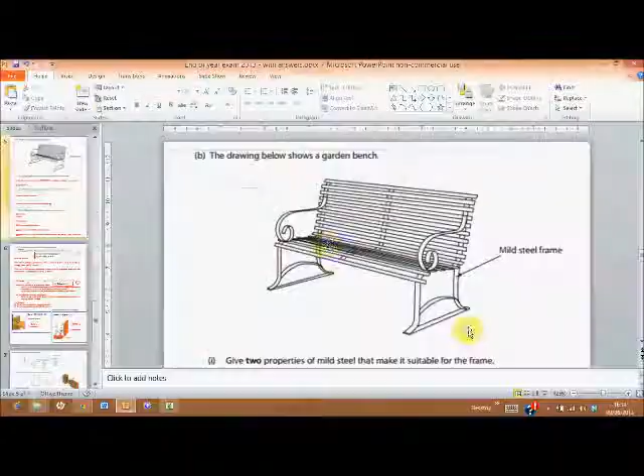Right, this one caught quite a few people out as well. This is a garden bench. Now, the question says, give 2 properties of mild steel that make it suitable for the frame. Right, so let's look at that frame.

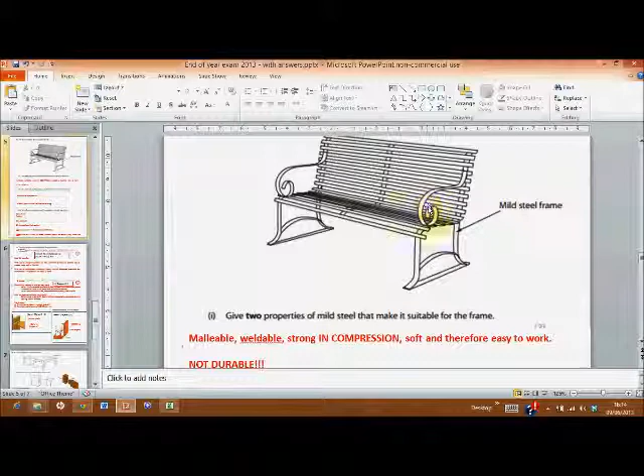Someone has decided to take this mild steel and bent it around. So what property allows it to be bent like this? The answer is malleable. It is easy to bend without it breaking. We can hit it around. A blacksmith needs things to be malleable because he starts it in one shape, heats it up, and bends it into a different shape.

How is this fixed together? How does that stay there? Well, it is welded from there to there. So we say mild steel is excellent.

Now, look, mild steel, guys, let's remind ourselves of this. It is the cheapest metal in the entire world. And it is the most used metal in the entire world because A, it's cheap, and B, it is very easy to work with. So easy to work with is something you can actually say. That means it's easy to cut because it's quite soft compared to high carbon steel, like your drill bits and your saws. So it's quite easy to cut, it's quite easy to drill into, it's quite easy to bend.

It's very weldable. So you can weld it together. It loves being welded. It does, our mild steel.

And we can't just say strong, I'm afraid. That doesn't mean anything. We've got to say strong in compression, because when you sit down there, if you get 5 people on there who are heavier build, with people on their laps too, we don't want these to get compressed and buckle. We need to be strong in compression. Might want to say it's tough in case someone jumps on it. It doesn't want it to shatter. That would be acceptable too.

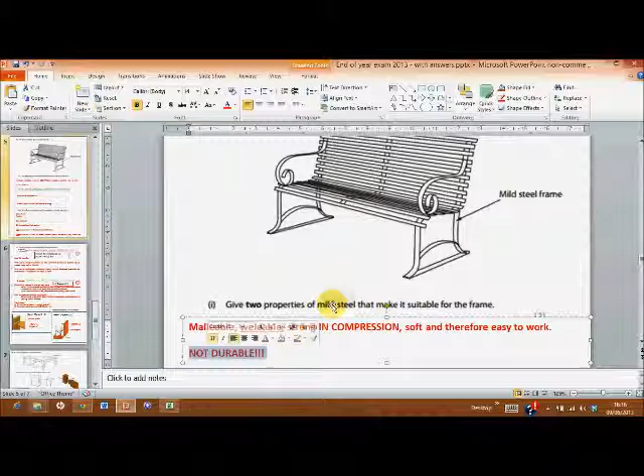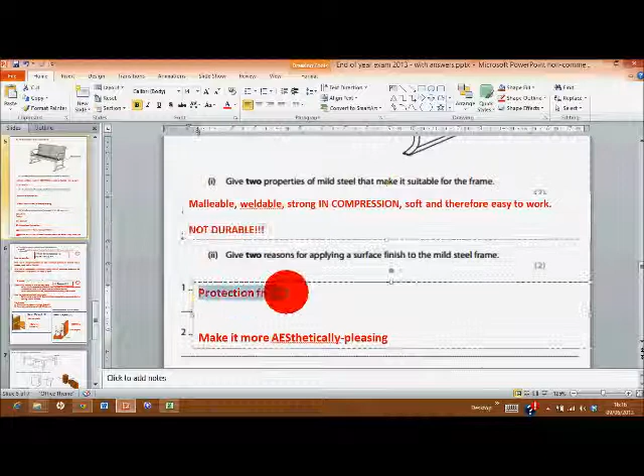Give 2 reasons for applying a surface finish to the mild steel frame. Well, I've just explained it rusts. So we've got to protect it from rusting, and more aesthetically pleasing would be another answer. Most of you got that, I'm very pleased to say. Watch the spelling, I don't think anybody spelt it correctly. A-E-S, aesthetically, okay, aesthetically pleasing.

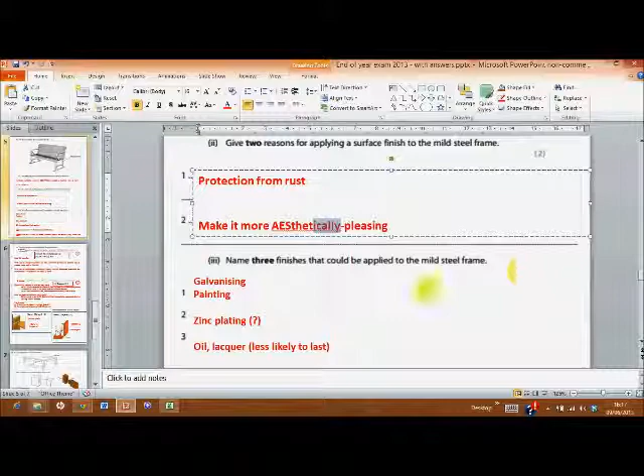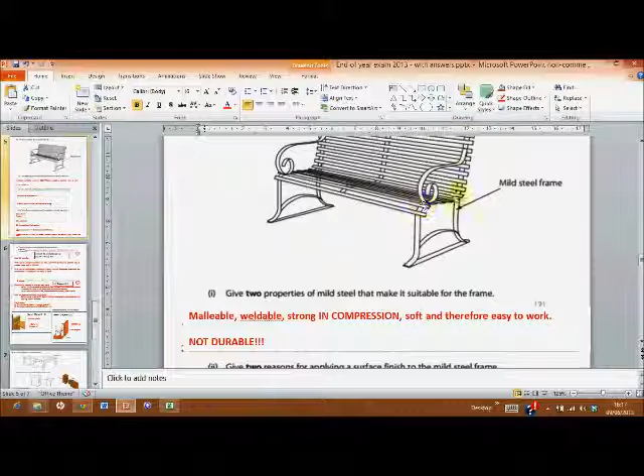Now, moving on. Give 3 finishes that could be applied to a mild steel frame. Well, the most likely in the real world for this would be galvanised. You take this mild steel frame and you pick it up and dunk it in a bath of liquid zinc. That zinc would stick on in quite a thick amount, quite a thick skin, and it'd make it extremely durable. So your bench would last 20, 50 years in the park. So we want that to happen.

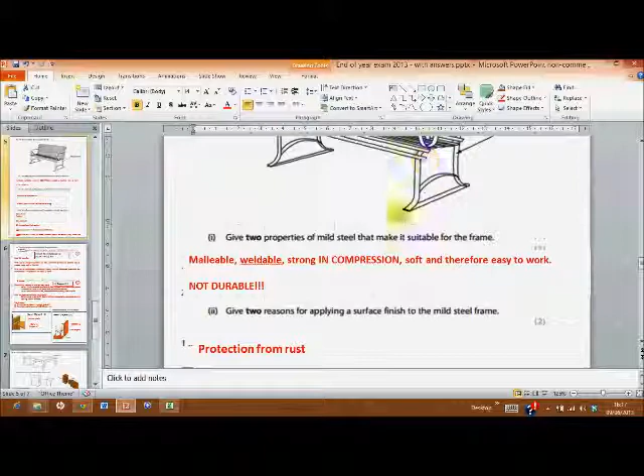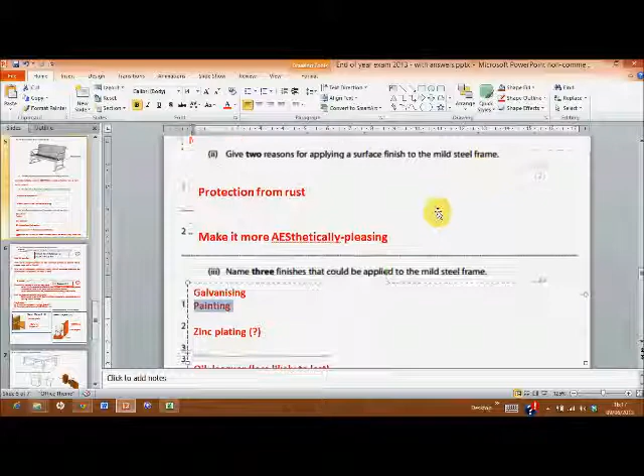So that is the most likely thing. You could probably paint it. The problem with painting is you've got to keep repainting it every year. That'd be really expensive. If it's a council, for example, it'd be a pain. If it's in your garden, you've got to paint it every year. But that is perfectly acceptable. But I don't think it's the best one. You'd probably find it's galvanised, then painted, because galvanising, excellent, but not the prettiest look.

Zinc plating, well, yes, you would get a mark for that. Zinc plating though, you don't zinc plate huge things, and it's only a very thin amount of zinc that ends up sticking on there. So it wouldn't last very long. If you use a zinc plated screw left out in the elements, that would rust over the course of 6 months or so.

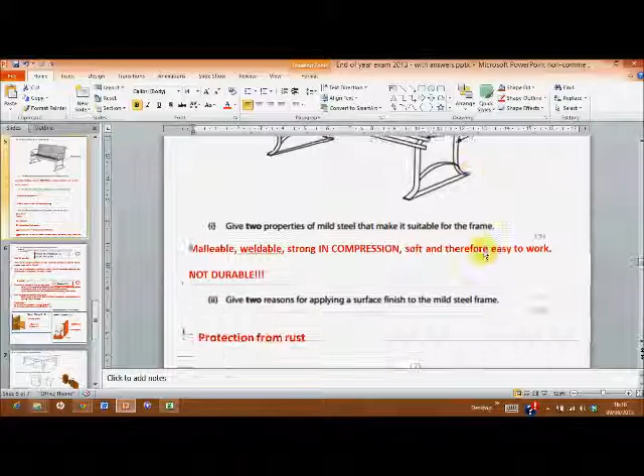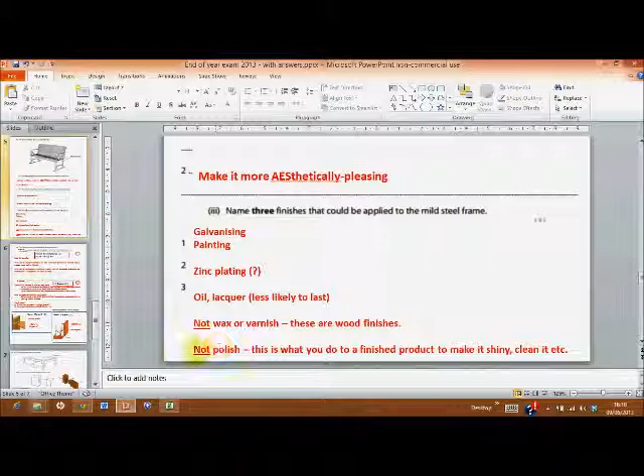Moving on, you could say oil it or lacquer it, but that doesn't give very much protection at all. What you cannot say, let's go back, you cannot say, is wax or varnish. Waxing is for wood, varnishing is for wood. You cannot say polish either, I think.

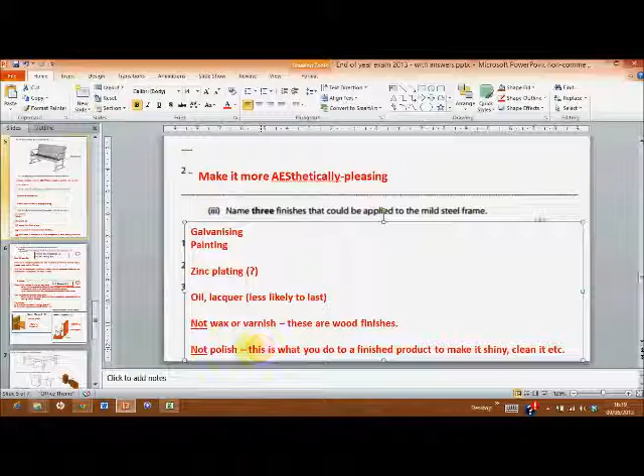What you do, once you've got a varnished wooden product, you might go and polish it with your polish. But that's just to buff it back up again. It's already been varnished, it's been finished. Polishing just makes it look nice and shiny. They're the same with metals, if they've been lacquered, you might go and polish it, but I don't think that's a finishing process. I may be wrong on that. I don't think I am, but I may be wrong.

Let's just go with the ones that we're definitely right on. So galvanizing, painting, zinc plating, oiling, lacquering, that's what you can do to mild steel to stop it rusting.

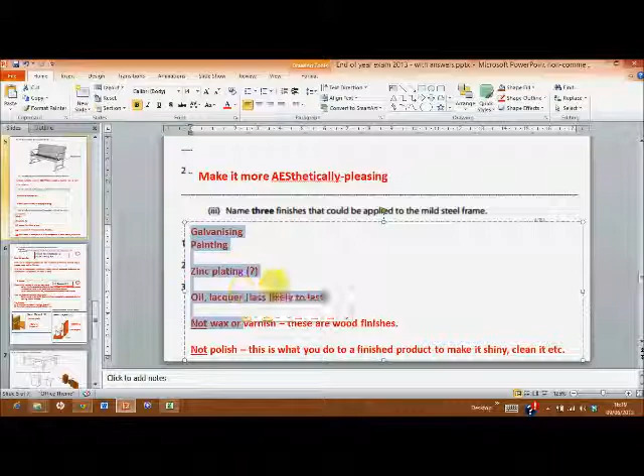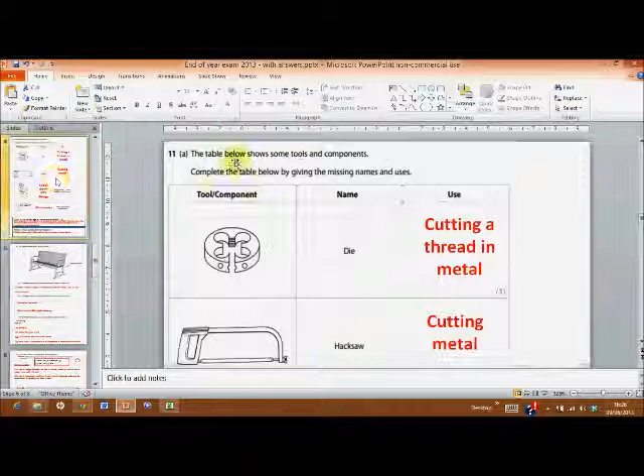Okay, so we're now getting towards the end of the test, and what you normally expect to see at the end of tests is some longer questions. So where you were seeing questions that just said give two properties, they are for 1 mark each, now we're seeing things like explain or describe. So one sentence is not going to cut it, one thing you say is not going to cut it.

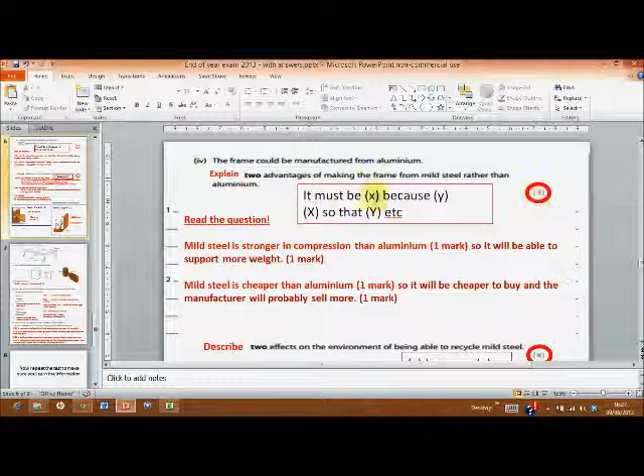You need to explain, and you need to get 4 points. You need to say it must be X, you get 1 point for that part. Because Y, you get 1 point for that. So 2 advantages, 2 times 2 is 4. So loads of you, I would say everybody, lost very, very easy marks because you didn't follow that format: X because Y, X so that Y, etc.

A few of you lost marks because you didn't read the question either. It could be manufactured from aluminium, but then they said 2 advantages why making the frame from mild steel rather than aluminium. A lot of people assumed aluminium. So just be careful to read the question.

So mild steel is stronger. If you just said it is strong, you get 0 marks, 0, 0, 0. Stronger than what? Mild steel is stronger than aluminium, that's what it's saying. Why would you use one, not the other? And stronger, I'm not happy with that. Stronger in compression would be a better way of saying that, not just strong.

So mild steel is stronger in compression than aluminium, so it will be able to support more weight. I mean, how obvious is that? You all know why you wanted that to be strong, but most of you did not say why. Obviously you assumed we were not idiots, and that is very kind of you, but you must assume we are all idiots, so it will be able to support more weight. Got you that sneaky extra mark.

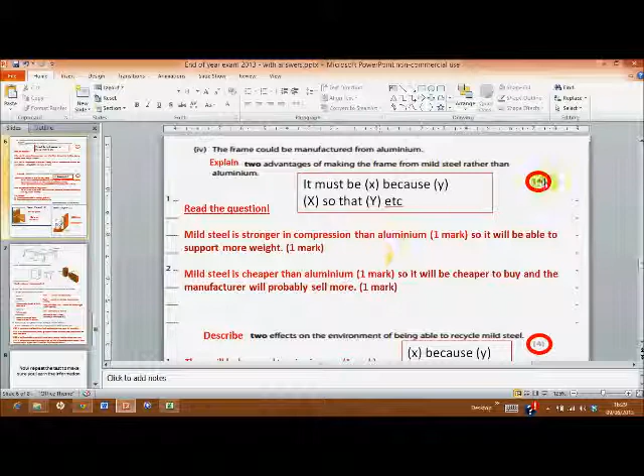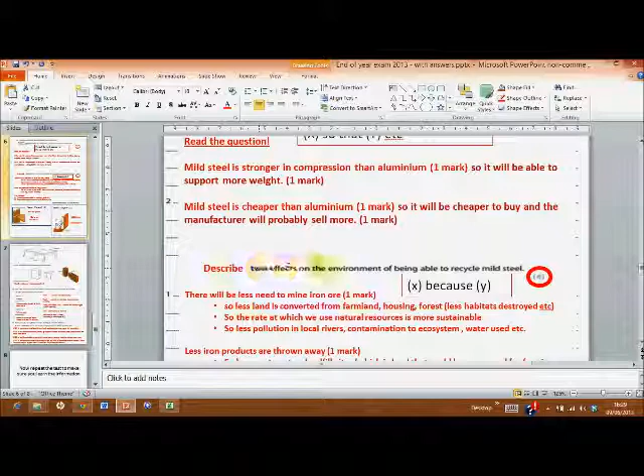You all know that, very obvious, but don't forget to check how many marks. Don't forget to look for that word explain or describe, so you know to answer like this. Again, describe 2 effects on the environment of being able to recycle mild steel. Now, we haven't done environmental issues yet, so this was a kind of pre-test. Again, describe, they're looking for X because Y.

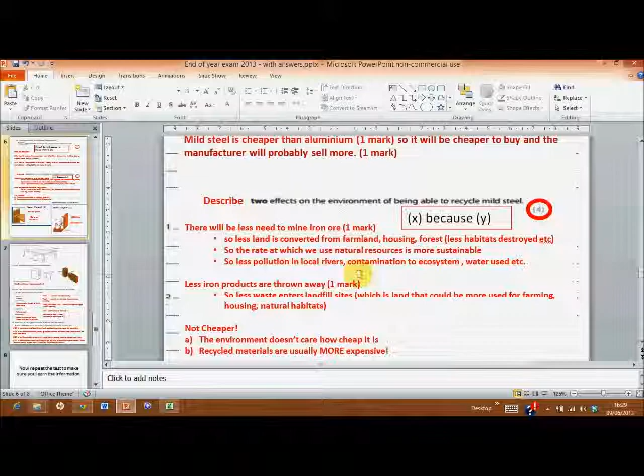A few of you said about cheapness. The environment does not care whether it's cheap or not. We need to focus, read the question, and make sure we answer that question by talking about the environment. So let me give you an example of what you could have said. If we can recycle mild steel, obviously there will be less need to mine iron ore, to mine the steel in the first place, or the components of it. So you get 1 mark for saying that.

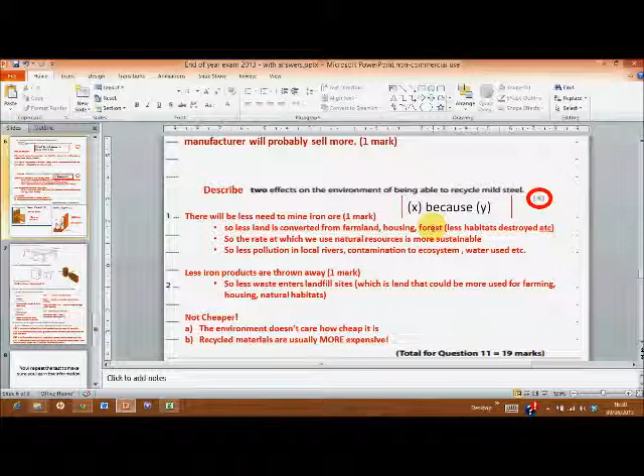You need 2 though. So what's the advantage of that to the environment? Well, if we're not mining so much iron ore, less land is needed. I mean, these iron ore mines can be vast, many, many miles long. Sometimes you've got to destroy loads of forest just building the road to get to the thing. So therefore, less land is converted from forest. It used to be forest, now it's converted to an iron ore mine. That's the way I've said it.

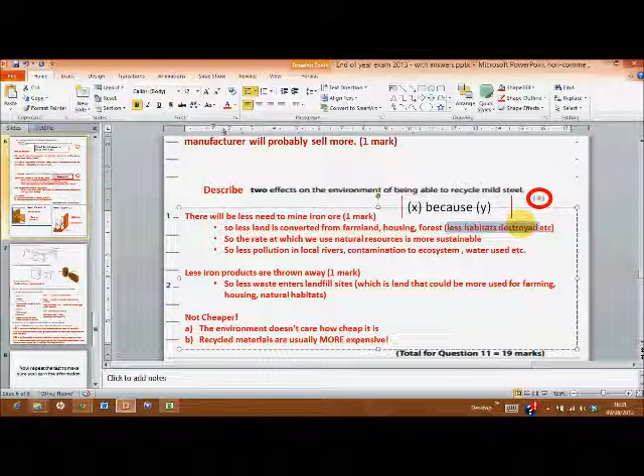Or maybe it was farmland. That land could be used to feed our ever-growing population, 8 billion people and counting. Maybe people could live on that land, and now they can't because we've got an iron mine there. Less animal habitats are destroyed, etc. That's your extra mark.

So the rate at which we use natural resources is more sustainable. That would be a good one, i.e. we're not going to run out of iron ore, so future generations will have some left. That'd be nice. That word sustainable, we'll get that in there.

So less pollution in local rivers, contamination to ecosystem, etc. When you have an iron mine, it uses vast amounts of chemicals and water to blast out the iron and the processing, etc. It's a messy old industry that often, particularly in less developed countries, leads to the pollution of local rivers, etc. So that would be a good justification for your 1 mark as well.

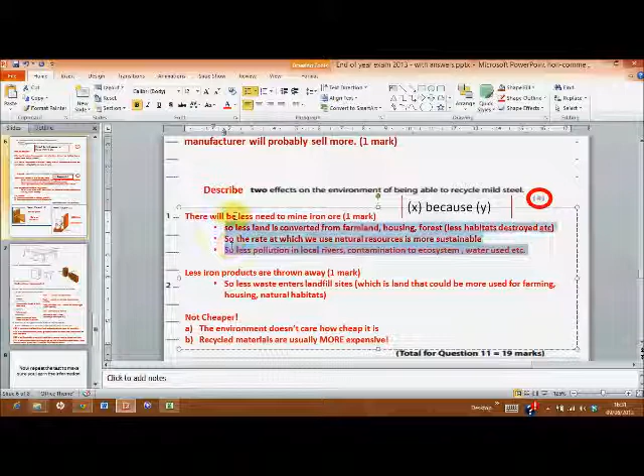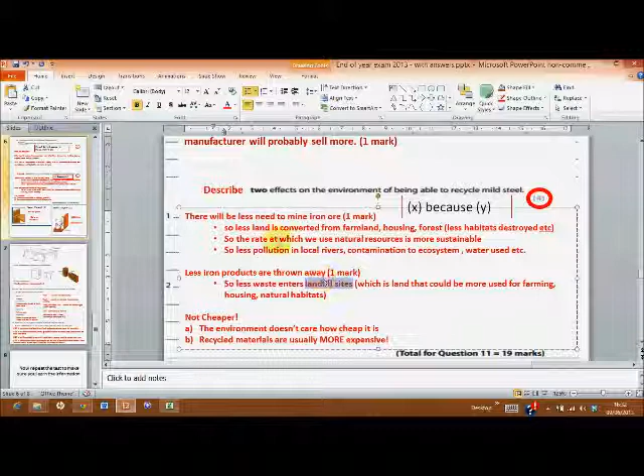You may say, less iron products are thrown away. Well, why is that good? Why does the environment care about that? Well, let's be obvious. So less waste enters, and where does it eventually go? It eventually goes to landfill sites. Please remember that term, landfill sites. Great big holes in the earth where we just chuck all of the pollution, all the rubbish that we make as the human species, ends up in a bally great hole. And that land again could otherwise be used for farming, housing, etc. Again, that waste can contaminate local rivers, that sort of stuff.

Do not say it is cheaper. Okay, I'm going to make that big. Not cheaper. Recycling things normally means that product is getting more expensive. Recycled things are not cheaper. It takes a lot of energy and time and effort to collect all the plastics and recycle them. It takes a lot of time and effort to get all the metals and recycle them. It ends up being much more expensive. Anyway, who cares? The environment does not care if it's cheap or not. So that never answers the question anyway, and that's the same point I've made.